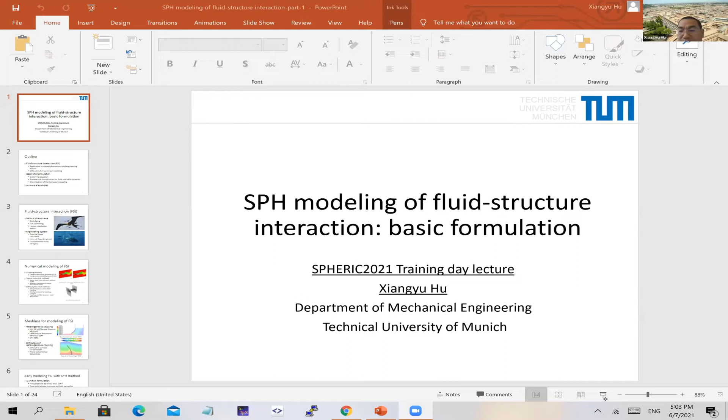So without more delay, I'm giving Xiangyu the microphone. So whenever, right. Yeah. Okay, so it's all yours. I'm muting myself. Thank you. Yeah, thank you very much, Daniel, for the very friendly introduction.

Now, my talk is basically on the SPH modeling of flow structure interaction. I separate this lecture into two parts. In the first part, I would like to give the basic formulation, which shows how we can use SPH to model fluid and solid structure in a unified formulation. In the second part of the lecture, I would like to give a more advanced situation, like the case when we want to introduce multi-resolution in this flow structure interaction modeling. Okay, so let's go to the first part.

So the outline of my lecture is like this. I first would like to introduce flow structure interaction, basically FSI, and its applications in natural phenomena and engineering systems. I'd also like to briefly review the difficulties for numerical modeling of FSI problems. Then I'd like to provide the basic SPH formulation, including the governing equation, the discretization for fluid and solid dynamics, and the discretization of how fluid and structure can be coupled. And at the last, I would like to give some numerical examples to show these applications.

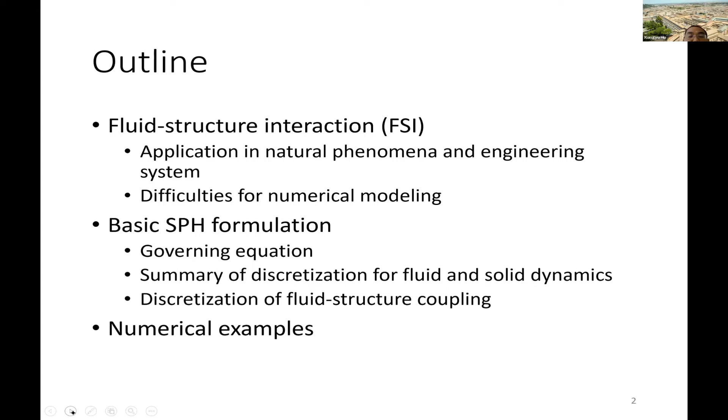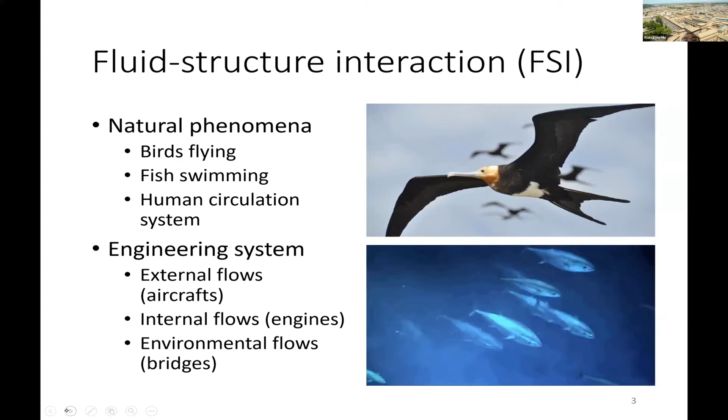Fluid structure interaction is a very typical problem involving both fluid and structures, and this type of problem can be found everywhere. In natural phenomena, we find it in bird flying or fish swimming, or inside our human body, like the respiration and cardiovascular system. This type of problem is also very popular in engineering systems, including external flow problems, internal flow like combustion engines, and environmental flows, for example wind blowing on a bridge. So flow structure interaction is a very popular topic.

To model FSI problems there are many different approaches, but all must consider the fundamental problem of how to couple computational fluid dynamics and computational solid dynamics. Since the community has been aware of this problem for a long time, people have developed very different approaches. Originally people used classic approaches like the finite element method or the arbitrary Lagrangian Eulerian approach. One typical issue for those methods is that they all rely on a mesh, so-called mesh methods.

Mesh methods face some crucial difficulties on this type of problem, because the mesh itself introduces a prescribed topology. As just shown in Daniel's lecture, the mesh has the property of partitioning the space, but this also leads to some strong drawbacks due to the lack of flexibility. When you consider a flow structure interaction problem, very often we face topology changes, and the solid structure very often has large deformation.

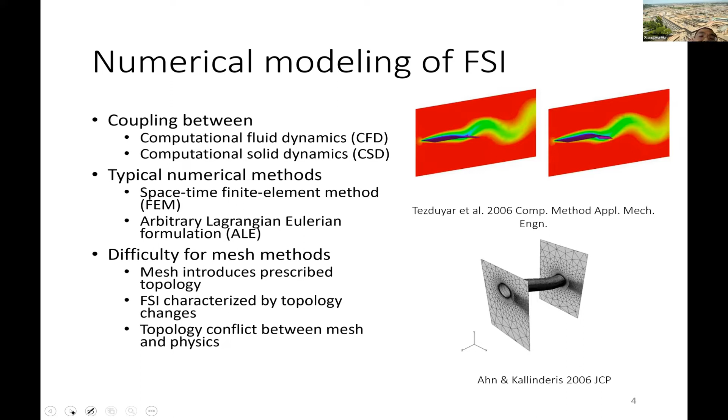So certainly, people would like to try the chance for a meshless method, because a meshless method has the benefit that you are not strongly relying on the mesh anymore, and you are more free to use particles to cope with complex problems with large deformation or a topology change.

So usually people will try a simple approach. The simple approach is basically they can introduce some simple coupling, especially the so-called heterogeneous coupling, which means they couple the SPH method with other types of numerical approach to cope with the FSI problem. For example, you can couple SPH with the DEM method or Lattice-Boltzmann method or finite element methods.

So this type of method is very simple because you don't need to develop a very specific approach. You can combine two already existing methods or software to do this coupling. But this type of heterogeneous coupling also faces very critical difficulties, because for those two different methods, when they couple to each other, very often they do not easily satisfy the physical conservation laws, especially the conservation of momentum.

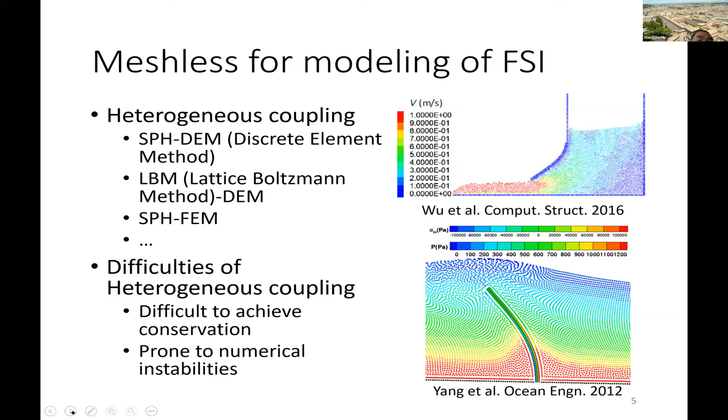So as we do SPH, we also certainly think about whether we are able to use SPH itself only to model this flow structure interaction problem, because as we know, the SPH method is so flexible, and it doesn't need to rely on a mesh, and that means we may be able to model the fluid and the structure within the same unified formulation.

So people really tried. Early modeling of FSI problems with the SPH method was done this way. I think the first paper on this is in 2007. What people do is they extend the formulation of the fluid to introduce extra properties to simulate the structure. So in this case, the fluid and the structure basically use almost exactly the same operators, like in Daniel's lecture, the operator for gradient, operator for divergence. They can use the same operator for both fluid and solid.

What they need to do is introduce some new factors to this equation, but these new factors are not so fundamental. They introduce a Cauchy stress into the momentum equation to replace the pressure, which we usually use for fluid dynamics. By this way, they introduce an extra stress tensor, the so-called deviatoric stress tensor, which describes the incompressible part of stress introduced by deformation. And this stress goes together with an evolution equation based on the so-called Jaumann formulation.

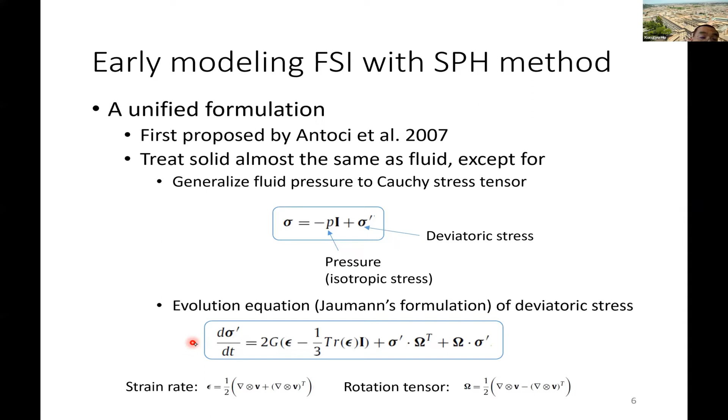Then you solve the equation just like solving the fluid equation, except you use the Cauchy stress tensor and introduce a special evolution equation for this deviatoric stress. So in this case, you are able to simulate at the same time, using the same discretization operators for solid and fluid. So that leads to the so-called early stage of FSI modeling with the SPH method.

People find this method is quite good. Very often they can simulate FSI problems with very good results. The issue they face is so-called artifacts in particle distribution.

So when you do a flow structure interaction problem, very often in your initial condition, especially for the structure, the particles are in quite good order. And as time goes on with this type of simulation, you can find the issue that the initially very well-organized uniform distribution of particles will go to some kind of noisy distribution. And this is not very serious if you do this for fluid simulation, because fluid doesn't have this so-called initial configuration involved with solid deformation.

But it's solid, because we know for elastic solid dynamics, all the dynamics is based on the deformation referred to the initial condition or initial configuration. And if we use this Eulerian formulation or the fluid-like discretization, we need to evaluate the kernel values, like the W and the derivatives of W, at every time step, just like the fluid. This we can call a so-called Eulerian kernel evaluation.

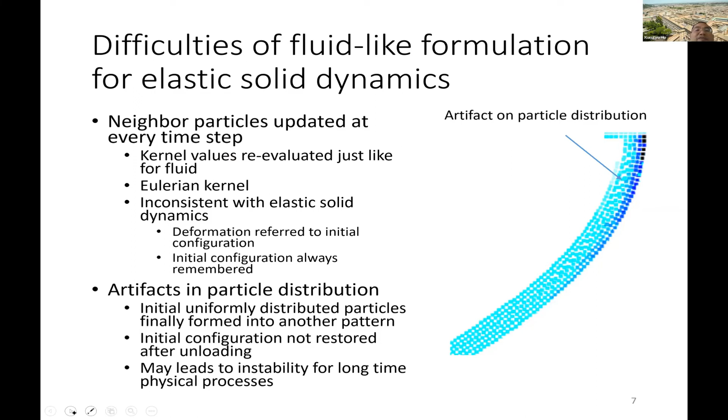For that, people later found that if they use a different way to model the solid dynamics, they can get a very good result. This is the so-called total Lagrangian formulation. This total Lagrangian formulation does exactly as the finite element approach. Every equation is built from the initial undeformed configuration. So they only evaluate the kernel at the initial condition once, then keep it unchanged. In this case, they can keep the particle distribution for the elastic solid very well defined.

Then they will not go noisy, and if you have unloading, then all the particles will go back to the initial undeformed configuration. That means they still remember everything. And this also introduces a lot of benefits. For example, this type of method is also free of tensile instability, when negative pressure or tension is in the solid. And also, as the kernel is only evaluated one time, you don't need to update anymore. So basically, it leads to very fast simulation of the solid dynamics.

And also, as you maybe already know, for fluid dynamics, if you update the kernel function every time step, as time goes on the particle topology changes so much, and the memory distribution of the particle data would be very bad. So you need sorting to increase the performance. But for solid dynamics, if you use a total Lagrangian formulation, you basically don't have these issues. So that's the case.

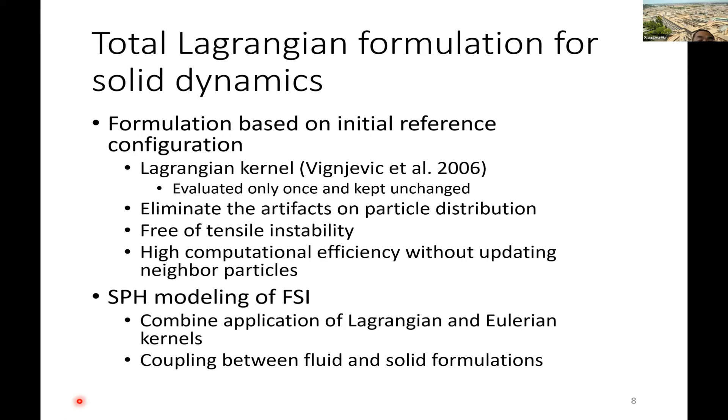So if we want to model this fluid structure interaction, I would like to use a total Lagrangian formulation for the solid, and we try to combine the Lagrangian kernel and Eulerian kernel together, and then couple the fluid dynamics and the solid dynamics in a conservative formulation, because we use the same SPH formulations. So here, basically, I show the governing equation. That's the same one as you already saw.

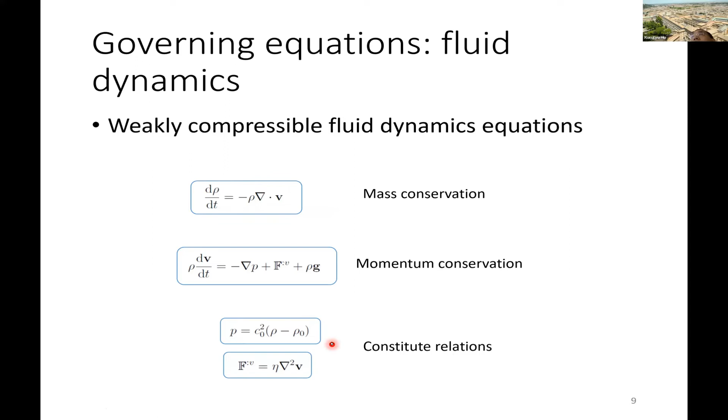And I would like to mention we also use a weakly compressible formulation for incompressible flow, because we find this can be much faster than using a pure incompressible formulation. And for the solid dynamics, as we use total Lagrangian, we build the kinematics, that means the displacement and the deformation, based on the initial configuration, and this deformation tensor basically only relies on the initial gradient operator with the corresponding initial configuration.

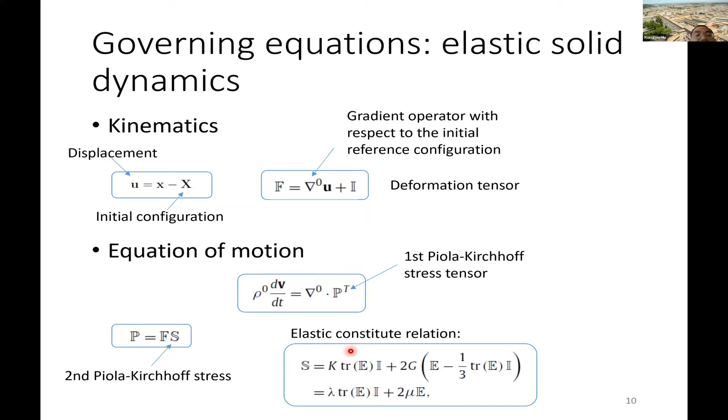And in this case, if we use total Lagrangian, then the momentum equation or equation of motion only relies on the gradient operator evaluated at the initial configuration and the so-called first Piola-Kirchhoff stress tensor. And this stress tensor can be related to the second Piola-Kirchhoff stress with an elastic constitutive relation. And you can use very complex ones like hyperelastic material or elastic-plastic material. They can all use this type of formulation, which makes this very flexible.

For the interface between solid and fluid, the solid particles determine the fluid-structure interface position. So how the interface moves is defined by the solid particles. We also introduce a so-called dynamic condition, meaning how the dynamic interaction happens near the interface.

First, for the fluid side, we need to apply the no-slip boundary condition for the fluid particle near the interface. We also introduce the fluidic force, like pressure force and viscous force, acting on the solid particles. In this way, we can couple these two systems.

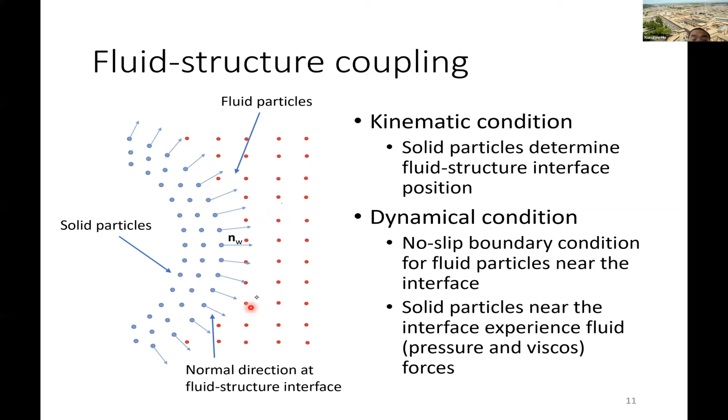After we decide this equation and the coupling, then we can discretize the equation. This here is the discretization for the fluid, very similar to what was shown in the first lecture. The difference is we have two extra terms representing the pressure force and the viscous force due to the presence of a solid structure, needed when those particles are near the fluid and structure interface.

And certainly we can also use other formulations for fluid dynamics.

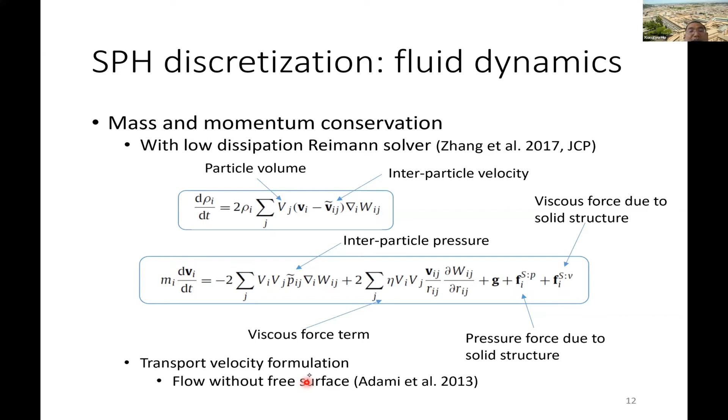For the solid formulation, besides using this Lagrangian kernel, which we only calculate one time, we also need to introduce a correcting matrix which can reproduce rotation of the rigid body, because rigid body rotation will not introduce any deformation. With this correction, we can recover this rigid rotation.

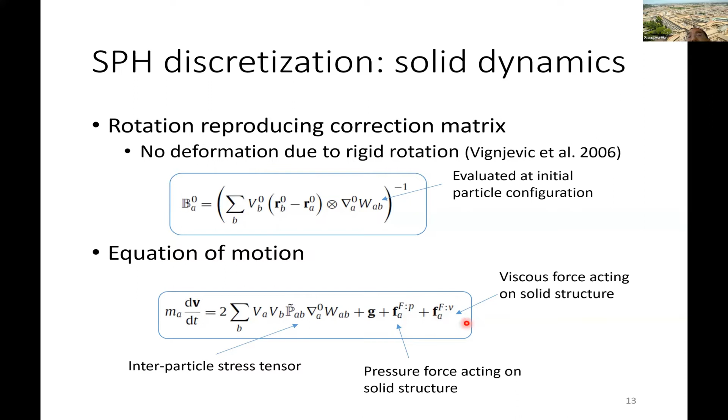Then we can discretize the equation with the introduction of the so-called first Piola-Kirchhoff stress. Here we also have extra terms: if the particle is near the interface, we need to consider the fluid pressure and fluid viscosity acting on the solid surface. With this, we can formulate the interaction force between the solid particle and the fluid particle.

And this we call a conservative coupling. Basically the coupling is based on a pair-force interaction: all forces have a force and a reverse force, and they cancel each other. If you sum all the forces together, you get zero.

Then we impose the boundary condition, which is the no-slip boundary condition and the pressure boundary condition. If there's no gravity and no acceleration for the solid, it's simply a Neumann boundary condition. When you have influence of gravity and solid acceleration, you need extra terms to account for that.

By this way, you can discretize this equation, and then you choose time stepping. When you do time stepping, you need to choose a time step criteria. In this case, we need to choose the minimal time step criteria from solid and fluid, then choose the smaller, minimum one of them, and do the time integration.

If we choose this way, we'll have some computational issues, because the sound speed in the solid is very often much larger than the artificial sound speed used in the water, so you will have loss of computational efficiency.

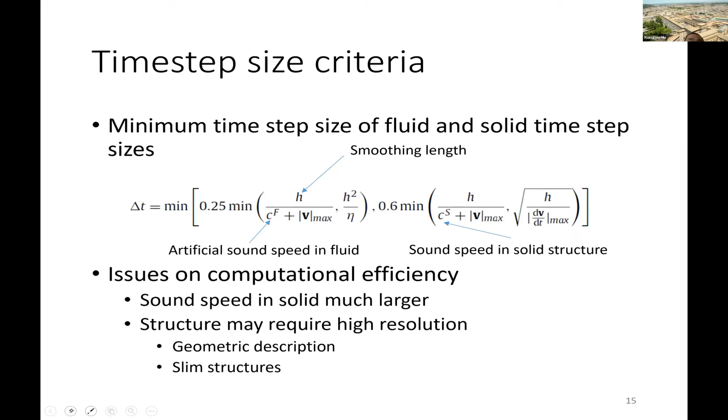As I don't have much time for this, if you want the detail of the formulation, you can check the code which we provide on GitHub.

Now I'd like to show some results. Here we basically just use total Lagrangian to simulate a pure fluid dynamic, pure solid dynamic problem, and you can check the convergence and the oscillation beam problems.

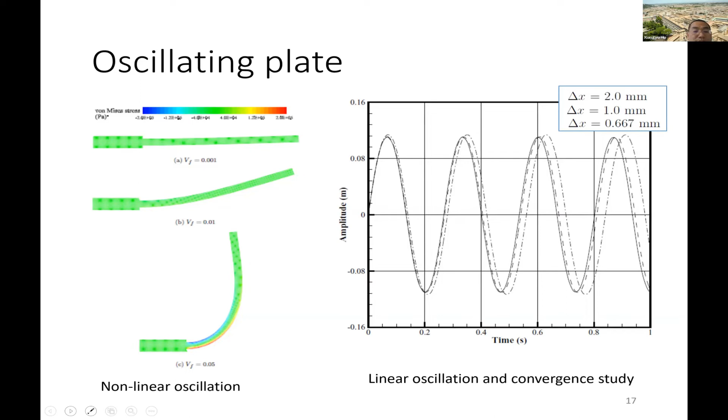We can also model the structure, this so-called elastic plate or elastic dam problem, a breaking dam problem, and you can have the elastic gate. This one's rigid and elastic, and you release it, and then you get the simulation result.

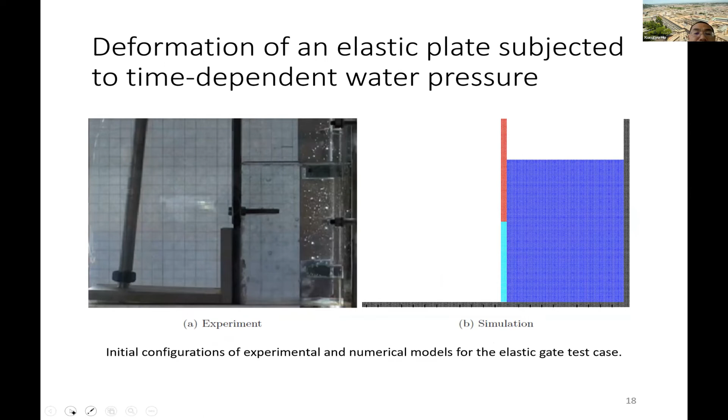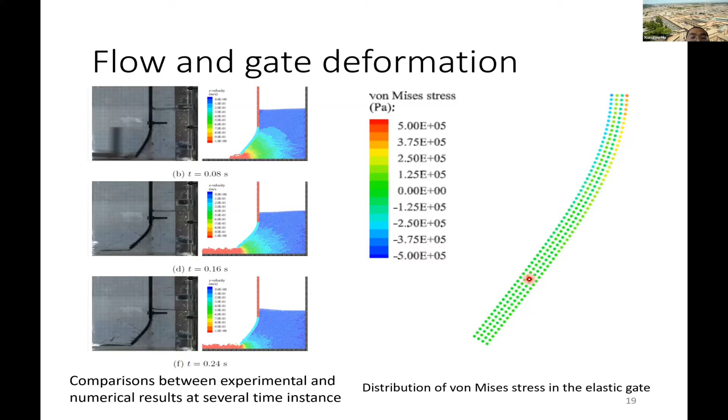You can see with total Lagrangian you get a very well-ordered distribution of particles when the solid is deformed. So you get a very stable solution and a very good result. This is a comparison with the experiment, compared with the simulation.

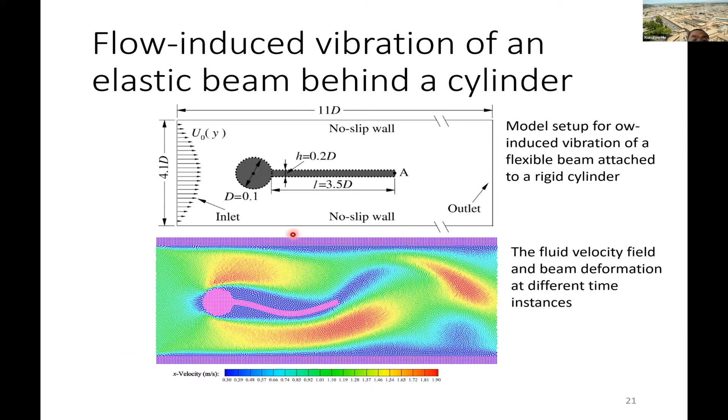I'd like to show another test case: you have an elastic body, solid, and fluid and rigid wall. You can do this flow-induced vibration of an elastic beam behind a cylinder. Using pure SPH, you can simulate this problem, and here the stress distribution is very well defined, and the particles are very ordered.

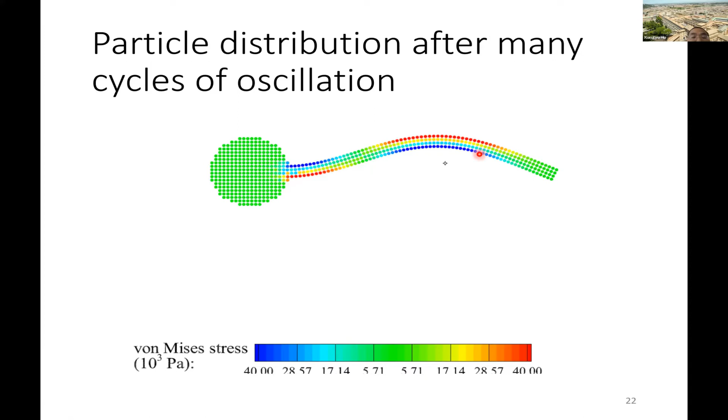And this we can measure there's frequency, and to compare with experimental and previous results, we got very good results. Now I basically can conclude for this basic formulation.

I would like to mention, if we want to simulate a fluid structure interaction problem, especially when using elastic solid interacting with fluid, I would strongly suggest using this total Lagrangian formulation, which has very good numerical properties, and we will obtain very good particle distribution. If we cope with the coupling between solid and fluid by a pair particle interaction approach, then strict momentum conservation can be achieved, and numerical stability is very good. I think that's the great benefit of using the total Lagrangian method.

Certainly, there's still an important issue with this basic formulation for FSI. One of the most important issues is computational time efficiency, because if we use the minimal time step criteria obtained from the solid structure and the fluid, very often we lead to non-efficient simulation, especially when the solid part has very stiff material. For example, a liquid coupling together with metals like aluminum or copper - in that case, the sound speed in the solid structure is so high that most of the computational time is wasted simulating solid dynamics. But since we use the same time step, we also waste the same time for fluid simulation, which is itself very costly, as particles need to be sorted and kernels evaluated every time step. So these are very inconvenient or awkward issues when doing fluid structure interaction.

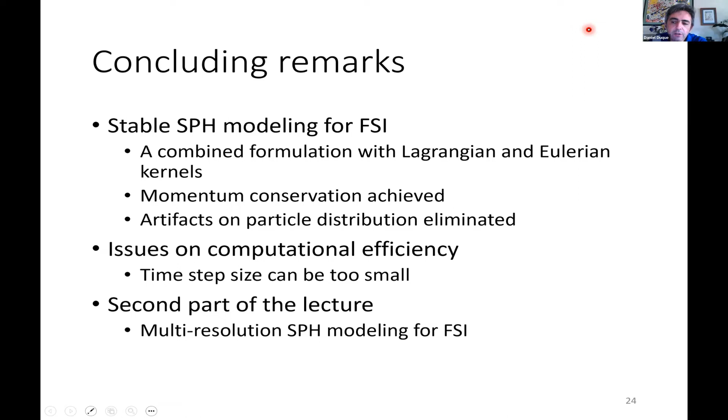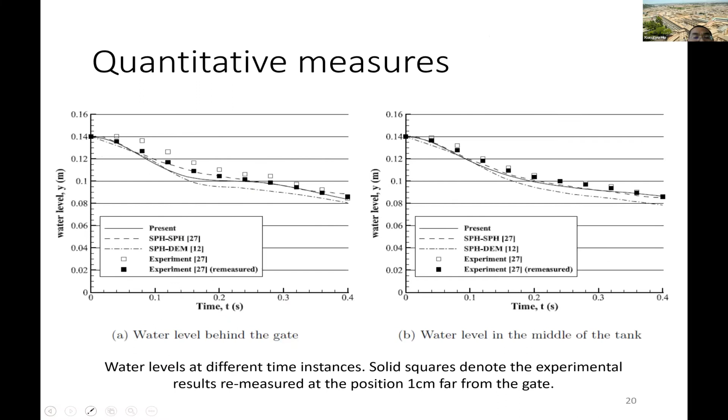Yeah, because we need consistency when the velocity of the solid is 0, and we just got a negative value. Yeah, so let me check. Ooh, yeah, I think - yeah, the A is solid, this A should be the fluid velocity, the I should be the solid particle velocity. So that makes this make sense. Yes, okay, that makes sense.

Here's another question: whether it's possible to model free moving solid particles, such as colloidal particles - I guess he means like dust. It depends how you try to model it. If you want a detailed situation, you need multiple particles for one colloid, and then you can use exactly the same formulation as we showed here. Yeah, that's an interesting topic. If you want a less detailed colloid, for example you don't mind the colloid shape, then you just use one particle to represent colloids. Yes, that's been done. Okay.

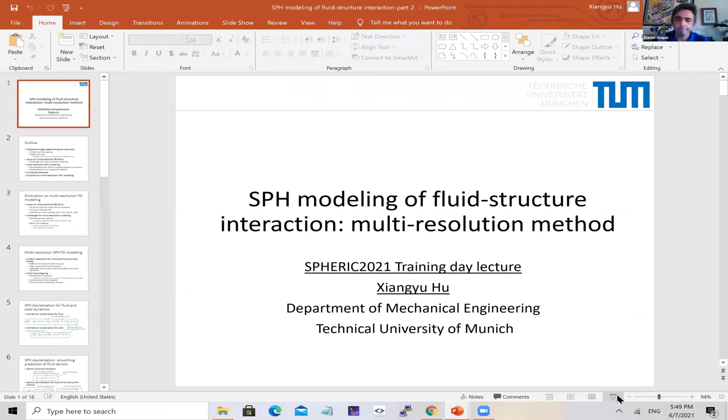I would like to introduce a little more advanced approach, the so-called multi-resolution method for modeling fluid structure interaction by SPH method. So the outline is like this: first I'll briefly review the traditional single spatial temporal resolution, using uniform particle spacing for both fluid and solid, with a single time step size for time integration, which is the smallest of those required by fluid and solid structure.

I would like to review a bit on the computational efficiency and challenges for multi-resolution modeling. Then I'll give the detail of multi-resolution SPH modeling, including discretization with different spatial and temporal resolutions. To address the challenge for multi-resolution modeling, I'll show a special position-based time integration method. After that, I'll give briefly numeric examples and outlooks for further multi-resolution SPH modeling development.

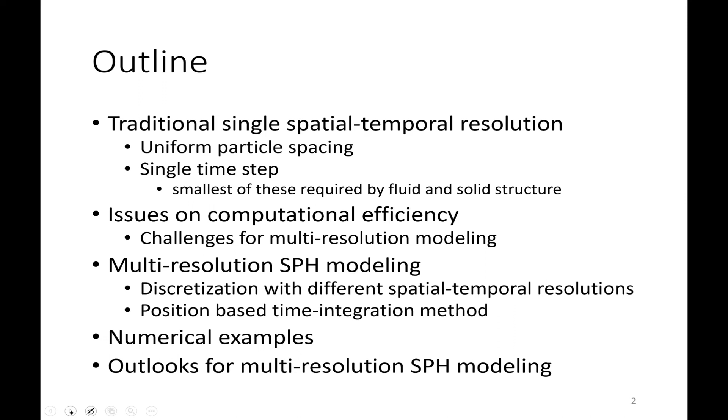The motivation for using multi-resolution fluid structure interaction is basically the efficiency issue, because very often we may need more accurate geometry structure of the structure, meaning we need a locally refined resolution for the structure. Sometimes the structure is relatively thin, requiring a smaller particle size. And sometimes when the Poisson ratio of the solid structure is high, close to 0.5, incompressibility leads to very high bulk modulus and sound speed, which leads to a very small time step size for the solid.

In this case, if we use a smaller time step for both fluid and solid, we waste a lot of time on the computation for fluids, because fluids, in this case, don't need such a small time step.

In this case, we would like to introduce multi-resolution modeling, meaning we hope to use different particle spacing for solid and fluid. But for this case, we need to consider that when you introduce a jumping of resolution, sometimes consistency issues will happen, especially when they cross the resolution jump.

If we want to further increase efficiency, we need to use a so-called multi-time stepping approach for time integration. We find that if we use the original uniform time step approach, we may not be able to fulfill momentum conservation property. Also, when you have different time steps for solid and fluid, their updating for force is not in the same frequency. That means when there's an interaction between the two, you need to find a way to match these two different frequency forces into one uniform interaction framework. So we need to solve those challenges.

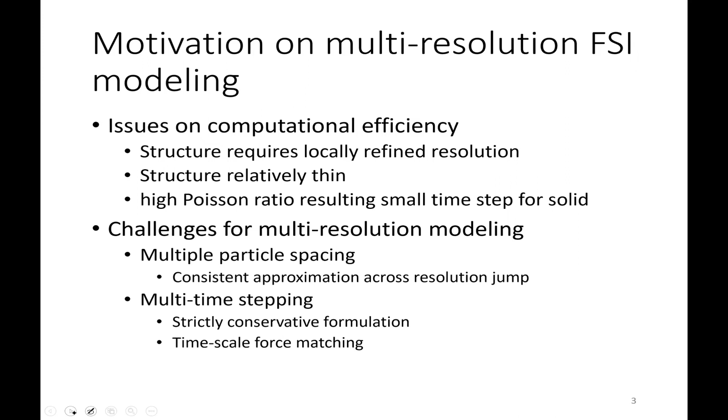So what we would like to propose is to use a uniform resolution for individual fluid and solid bodies, because this is the simplest case. That means we use one resolution for fluid and another resolution for solid. For solid, we assume we will have higher resolution, which is applicable in cases where lower resolution is sufficient for the fluid part.

In this case, if we want to save some time for the time stepping, I would like to introduce a nested time integration approach. Together with some special time stepping approach, like the dual time step criteria SPH method, we may have more complex nesting of time integration steps. Certainly, we hope that conservation is strictly imposed because of numerical stability and convergence property, and we also would like to cope with force matching problems.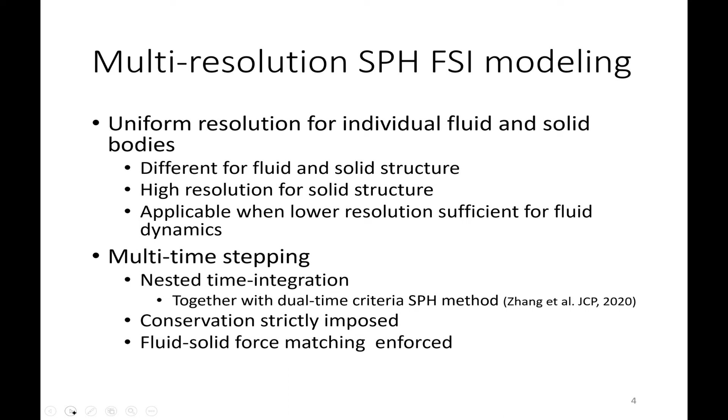So let's have a look at what we can do for this discretization. The first case is what's the step is simple: we just simply use different smoothing lengths for the solid and for fluid. For example, we use larger smoothing length, meaning larger particle spacing, when we discretize the momentum equation for the pressure term, the viscous term, and also the interaction force term.

So we use the same smoothing length for fluid. But when we introduce dynamics for solid, when we discretize the stress acceleration, then we use the solid smoothing length, which is smaller than the one used for fluid. This is the same formulation as before; the only difference is we use a smaller smoothing length and particle spacing. But we need to use the same large smoothing length for the interacting force, which is viscous force and pressure force—they are also fluidic forces, so we also use the smoothing length for the fluid.

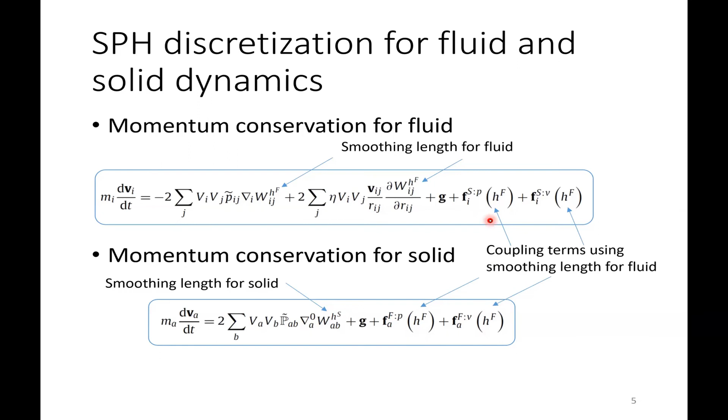So in this case, as we said, we have a different resolution. Then you have a different resolution jump between the fluid and the solid. In this case, we need to cope with this resolution jump, especially this issue happens when you evaluate the density for the fluid.

If we use the evolution equation for the density, the one shown in the first lecture, we will use this symmetric formulation. In this case, you consider the volume of particle I and its neighboring particles. For a fluid particle, the neighboring particle can be solid particles. In this case, the solid particle has a smaller particle spacing, meaning a smaller particle size, so this introduces small different particle volumes. This is quite straightforward—we do not need to do many changes.

The other thing is if we use some other special approach like the dual time criteria SPH method. In that method, we introduce another time criteria similar to incompressible SPH, which has a very large time step. In that case, we need to introduce a so-called density reinitialization approach. When we introduce different particle sizes, we need to use a special treatment for the initialization of density to account for the fact that particle sizes for fluid and solid are different. This way, we can obtain smooth density evaluation near the fluid and solid structure interface.

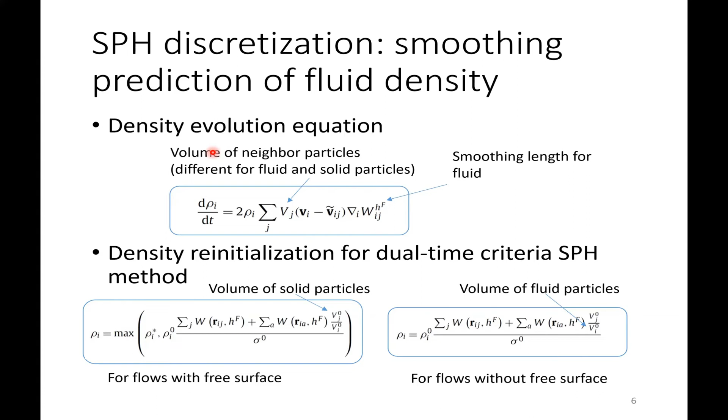So by this way we can handle the density, and then for time stepping, what we can do is the multi-time stepping approach.

That means we have a different loop range. So if we consider we use a dual time stepping SPH method, that means we introduce advection time step criteria based on the advection speed of the particle, like the incompressible SPH. Then we make one outer loop. That means this loop with the largest time step.

Then below that, we will also have the so-called middle loop. This middle loop comes from the time step criteria of the fluid acoustic criteria, which is less than that of this advection criteria. And below that, we have the minimum time step size for the inner loop, which is from the solid acoustic criterion, which is dominated by the speed of sound in solid.

And for this dual time stepping SPH method, the advection time step criteria controls the frequency for updating fluid neighbor particles. So as we know, as we use total Lagrangian formulation for the solid, we don't need to update the neighbors for solid particles, but we need to update the neighbor particles between the solid and the fluid. So in that case, we still need to update the neighboring particles.

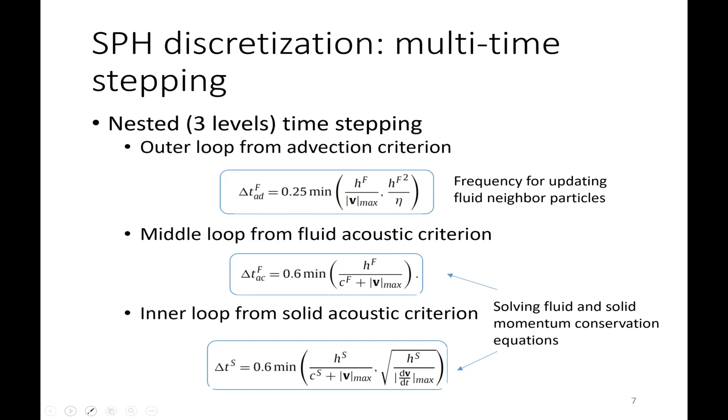So I'd like to show you one example. If we assume that we have one fluid acoustic criteria time step, then we will have four solid time steps. So in this case the time step ratio is 1 to 4. And then we show if we use the original velocity-based Verlet or the kick-drift approach for solid dynamics, which updates the position one time and the velocity 2 times, each a half time step. So this is the Verlet method.

And this one is for fluid, so we update 1 step position and two half steps for velocity. And if we use the same algorithm for the solid, then you will have a situation like this. You will update the space 4 times for the solid. The only thing is it's not exactly 4 times for the solid velocity, because there are 2 half time steps, in front of this loop and behind this loop. And that makes the momentum conservation, which is related with the update of velocity, not strictly conserved.

So to achieve strict momentum conservation, we need to modify the velocity-based Verlet algorithm into position-based Verlet. In this case, we update the position by 2 half time steps, but update the velocity in 1 time step. Then we switch the relation for position and velocity update between fluid and solid. For the solid, the velocity is updated exactly 4 times, which exactly corresponds to the time instants for the fluid updating. And then we have introduced one head and tail for the position update.

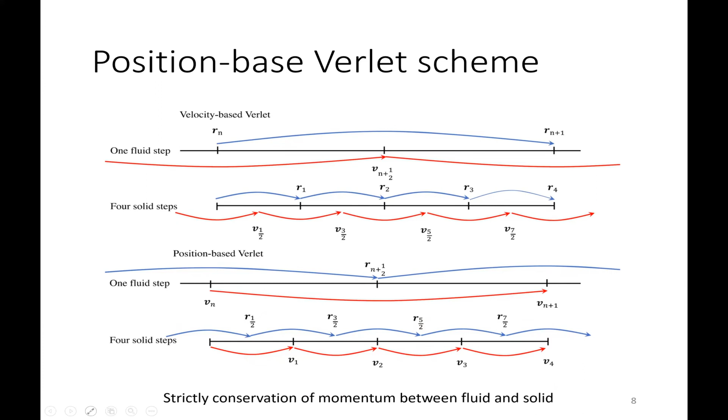So now we need to have a force matching. Oh, that means before there's something wrong. There's a typo. This should be 2 times this A and 1 time this V. Yeah, this is really a typo. Okay, so in this case, we need to have a force matching between fluid and solid, because as we know, for 1 fluid time step, we only update the velocity 1 time. But for the solid, for the same time period, we update the solid 4 times. So which velocity update would be used for the interaction term?

What we do is we introduce a solid and fluid boundary condition based on the averaged velocity for the solid particles. So we average the acceleration from the solid particle, and at the same time we average the velocity from the same particle. So here, as I say, there's a typo there. It should not be this. This should be here.

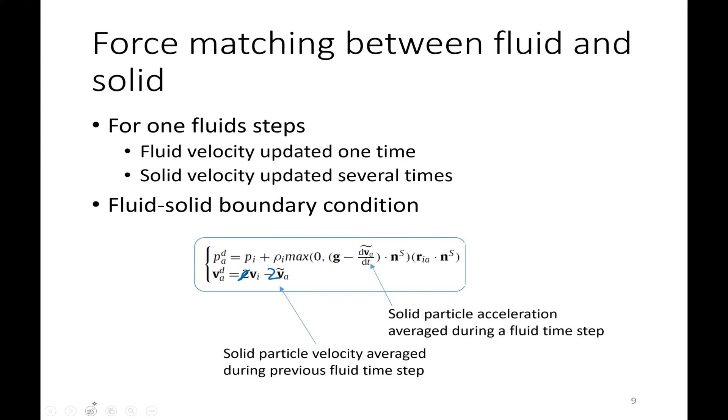By this way, when we calculate the interacting terms, the velocity of the fluid and the solid basically mean the velocity for the same time period. Then we can solve the problem of this force matching.

So I show you the algorithm; there are 3 different loops. You can see the outer loop, which is for the advection criteria. Then with the middle loop, we do the acoustic criteria for the fluid, and then the inner loop, we do the time step for the solid. And in this loop, we use a position-based Verlet approach so that momentum can be strictly conserved. Okay, so that's the algorithm.

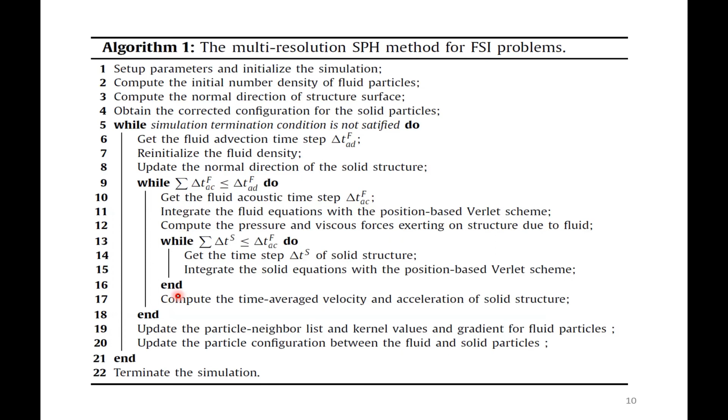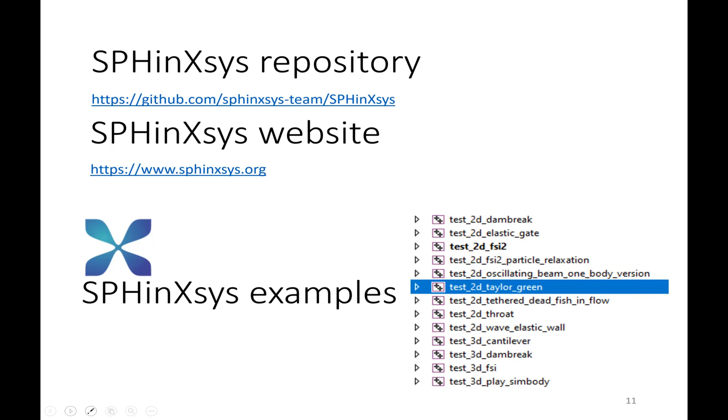If you have interest in the detailed algorithm, you can also check the repository for the code, and there are examples of solid dynamics FSI problems, and you can check how it is exactly implemented for the multi-resolution approach. Here, I'd like to show some examples. With this, you can simulate some special cases which are very hard for a single resolution approach.

The first case is the so-called hydrostatic water column on an elastic plate. You have a water column and an aluminum plate with very high sound speed, and you want to obtain the deformation of the aluminum plate under the action of the water. Here I choose different cases with different resolution ratios. Ratio 1 means same resolution. A ratio higher than 1 means the solid has higher resolution. Ratio 4 is the highest situation.

Here we consider the same resolution for the solid, so in all cases the plate has 8 particles along the surface. And we try different time stepping approaches: single time stepping and multiple time stepping. Keep in mind, this single time stepping is also for multi-resolution. The extreme situation, single time stepping and same resolution for solid and fluid, we didn't show here because, as you can imagine, it would be extremely slow.

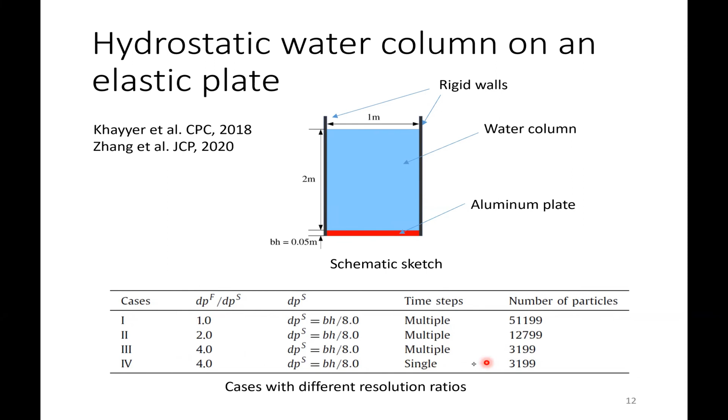Here it gives the number of particles, and we show the result. This is the mid-span displacement of the elastic plate at a constant solid resolution, but with increasing fluid resolution by introducing different resolution ratios. Higher fluid resolution gives a low resolution ratio; lower fluid resolution gives a higher one. The simulations give approximately the same displacement, because the solid resolution is exactly the same. The simulation is very stable, approaching an equilibrium state with an accurate value.

We can also use a fixed fluid spatial resolution with different resolution ratios. When you increase the resolution ratio, meaning the same fluid resolution but higher solid resolution, you get very good convergence. And if both resolutions are increased, you also get very good convergence. Keep in mind, this convergence is high order, not first order as we usually obtain for SPH; probably second order. And from the energy decay, the simulation is very stable.

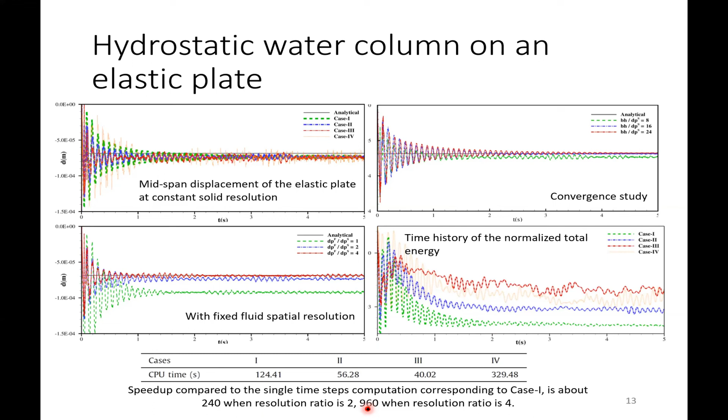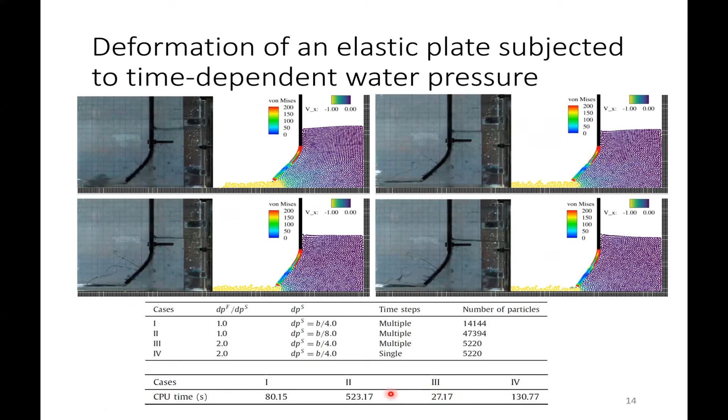Using the same approach, you can do other simulations. For the elastic dam break problem, with multi-resolution you decrease the simulation time very much. With multiple time stepping and high resolution ratio, you get a very small simulation time compared to very large times. A similar case is the flow-induced oscillation of an elastic beam behind a cylinder, where the simulation time with multi-resolution is very small compared to a very large value.

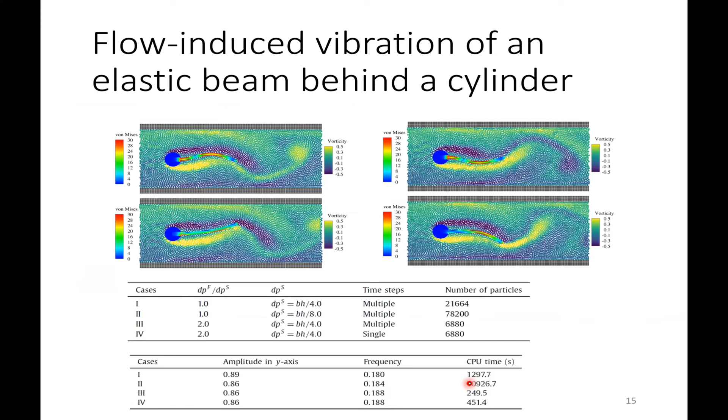If you use multi-resolution, then the speed up is very great. Okay, so as you have this multiple resolution, then you will be easily able to simulate structures with thin structures in the flow. For example, here we consider a vein, ideally the vein with flexible valve leaflets. So the valve leaflet is very slim compared to the fluid particles. Then you can simulate, because you can introduce high resolution for the two valves and obtain the flow structure.

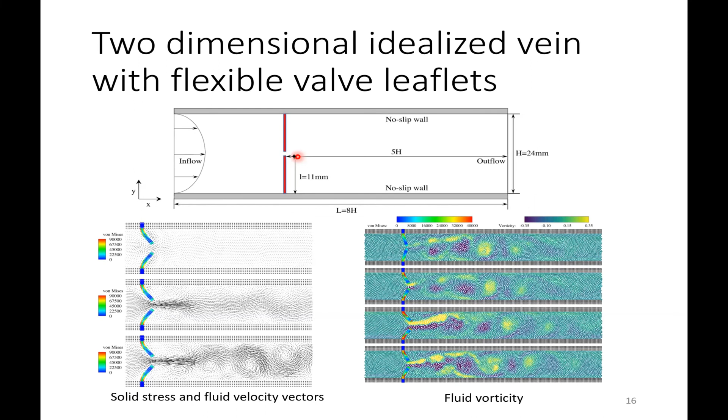When the flow simulation doesn't need very high resolution, then in this case we can get accurate simulation for the solid part, because in that case the solid may require higher resolution. And we can also introduce similar things when we do other more complex fluid structure interaction. Here is one case: you tether one fish body type of structure and put it into a flow, then this fish type structure will flex and flap, producing vortex in the flow.

And in this case, you can use quite an accurate fish model, because as you see, the fish tail is quite thin. So in this case, you can use smaller particles to model this fish-like structure and use even larger particles for the fluid. Then you are able to obtain quite accurate results for the fluid structure interaction problem, which is very important if you need refined structure there.

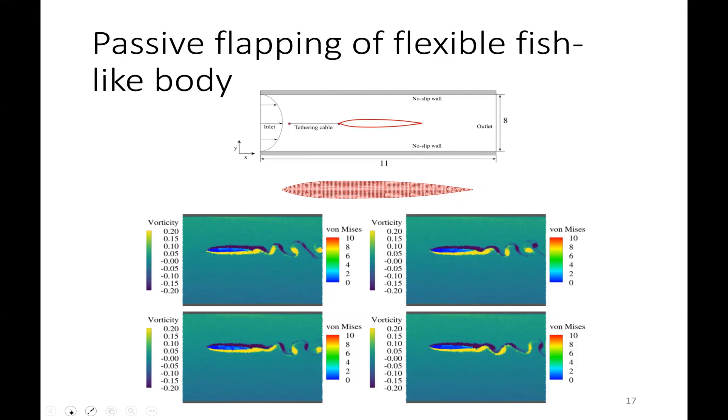Okay, so that's the example. And here I basically show you that we can use different resolution, that means different resolution for fluid and structure. And if you can cope with this momentum conservation issue, and if you can cope with the resolution jump consistency issues, for example, density evaluation, then you can introduce the multi-resolution method for this type of problem very easily. And we also got a very good result for this.

And actually, the multi-resolution idea can not only be used for fluid structure interaction. For example, if you have two different fluids, different fluids can also have different resolutions. For example, here I would like to show the example which we did when you consider.

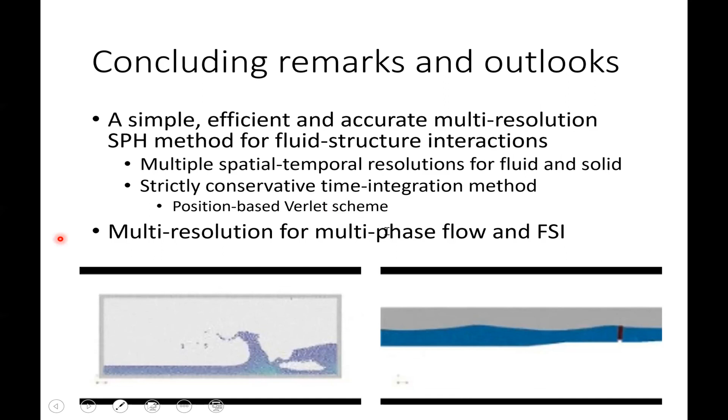This cannot show. Oh, it's because this one is not. Let me disconnect this, and then I would like to show again. Hey, cannot. Yeah, I think it might work now. Why is it not working? Surprise. Preview. There was a preview option, and I think that tends to work. I'm not using PowerPoint so much, but okay. But actually, it's on YouTube, so it's not so difficult.

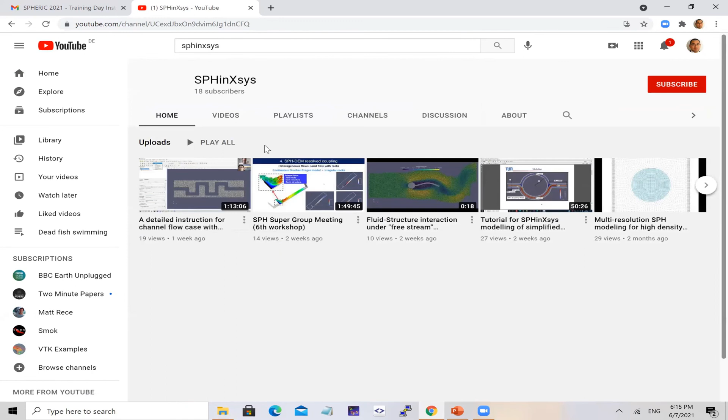In this case, you can use a different resolution for two different fluids, and when you have a complex situation, you have fluid and structure and different fluid resolutions. This problem I would like to show you is this. Yeah, this one. So in this case, you have two fluids.

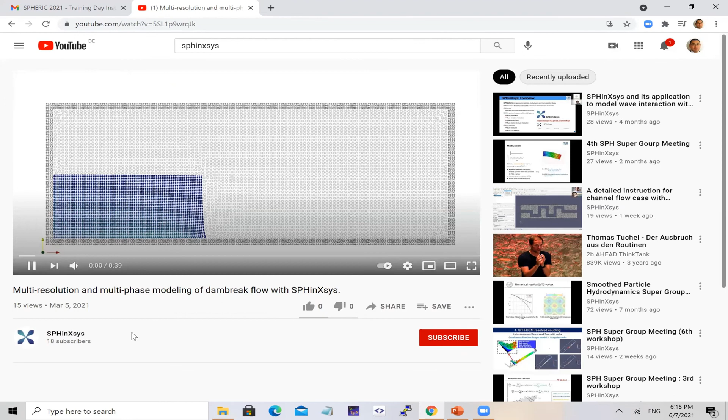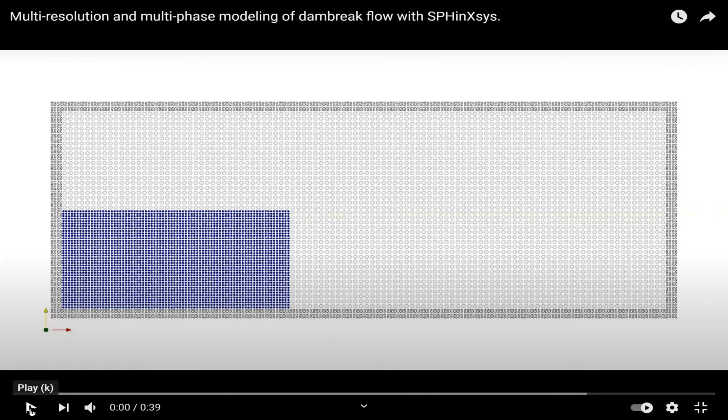You see, you begin this dam break. You have air particles with low resolution, high resolution for the liquid particles, and high resolution for the wall particles. Then you can introduce the same idea when you use different resolution. If you cope with density jump or smoothing length jump and the conservation issue, then you're able to simulate the problem with very different resolution.

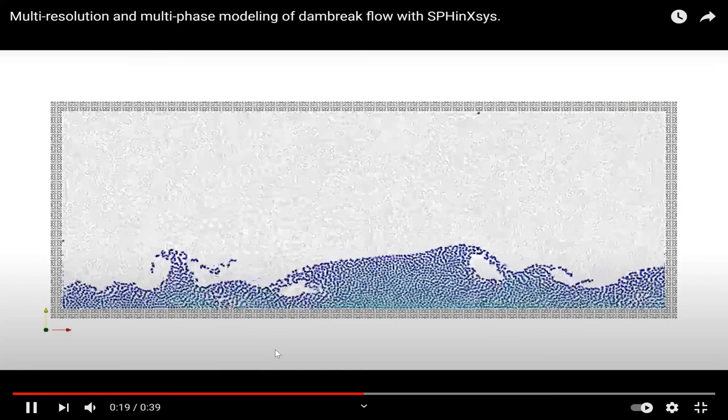So here you can consider the case when you have different fluids with different resolutions. Because in this case, dam break, the splashing is more important than the air motion, you can use a high resolution for the liquid and low resolution for the air. And this is a case for that. I can also show another case when you have an even more complex case.

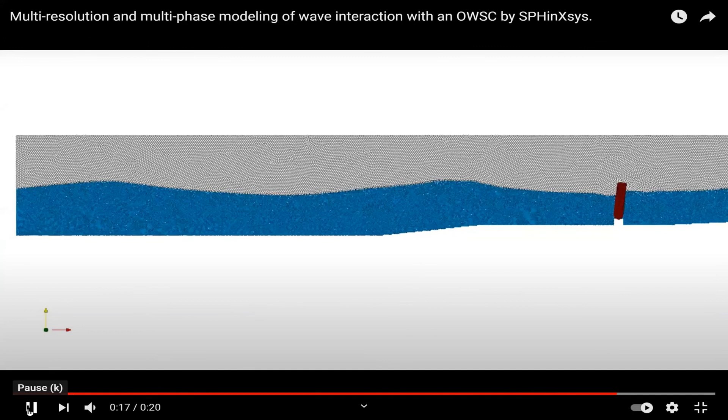Here is a case with an ocean driven wave. Then you have low resolution for the air, high resolution for the liquid, and even higher resolution for the structure. Then you can simulate the problem with the multi-resolution idea. But importantly, you need to cope with the issue of resolution jump consistency and momentum conservation at the boundary interface. Okay, so that's the example I'd like to show to you.

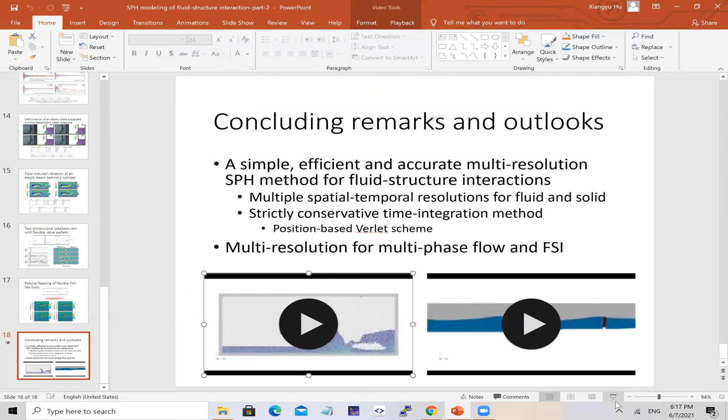And basically, I should close it. Okay, so this is my outlook, and I'm happy to answer your questions. And certainly, I will answer the questions left over from the first part of the lecture.